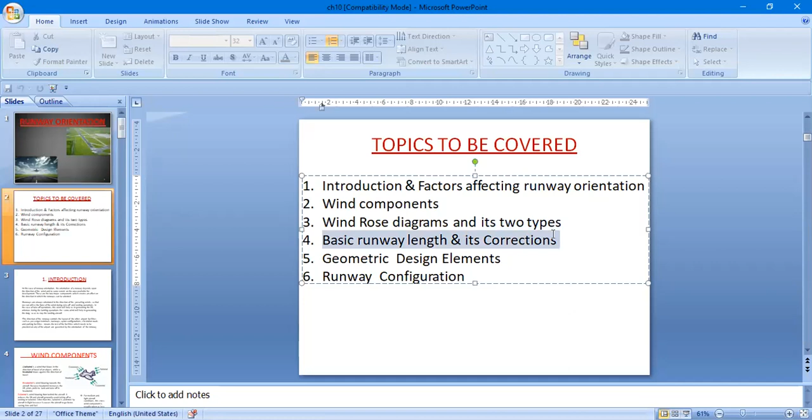You see, you have introduction, factors affecting the runway orientation, you have the wind components, wind rose diagram and its two types - this is very important. Then you have basic runway length and its correction - this is also very important. Then you have geometric design elements and runway configuration.

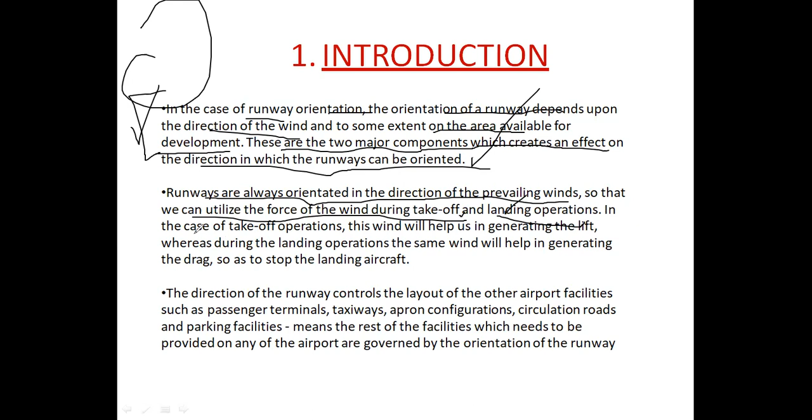Now, in the case of the takeoff operation, the wind will help us in generating the lift. Theek hai, lift generate karne mein help karegi. Whereas during the landing operation, the same wind in the prevailing direction, because aap opposite direction mein land karoge, will help you in generating the drag so as to stop the landing aircraft.

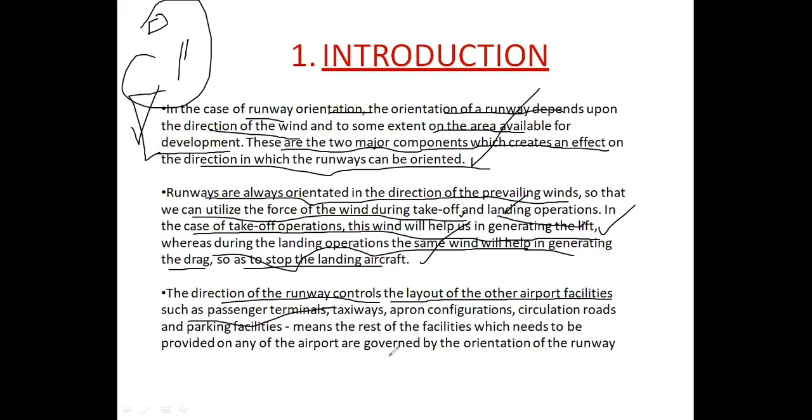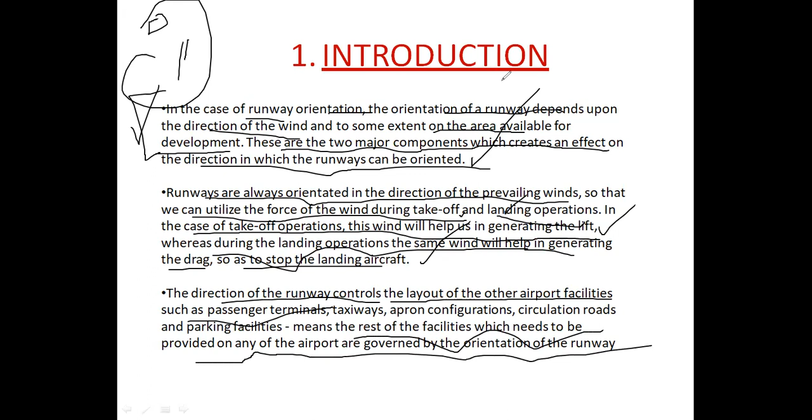The direction of the runway controls the layout of the other airport facilities such as the passenger terminals. Where the terminal buildings will be, where the hangars will be, where the aprons will be - all of that is dependent on the orientation of the runway. So the direction of the runway controls the layout of the other airport facilities such as the passenger terminals, the taxiways, apron configuration, the circulation roads and parking facilities. All the rest of the facilities which need to be provided on any airport are governed by the orientation of the runway. Is anyone having any problem with this?

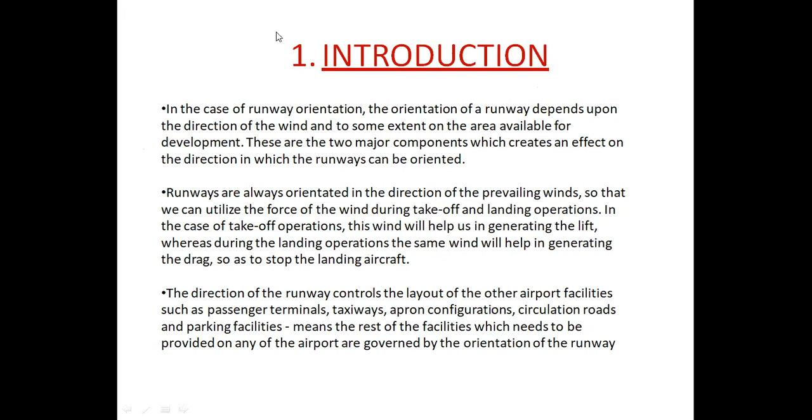Next we have wind components. Here the components of wind are shown. First, let's talk about tailwind and headwind. A tailwind is a wind that blows in the direction of travel of an object. If the plane is moving in this direction and the wind is blowing like this, this becomes your tailwind, because the wind is blowing in the same direction as the direction in which the object is traveling.

While the headwind blows against the direction of travel - so this is the headwind. If your plane is moving in this direction, the wind that is moving in the opposite direction becomes your headwind. Headwind is the wind that is blowing towards the aircraft, in the face of the aircraft. Because the headwind increases the lift, the pilot prefers to land and take off in the headwind.

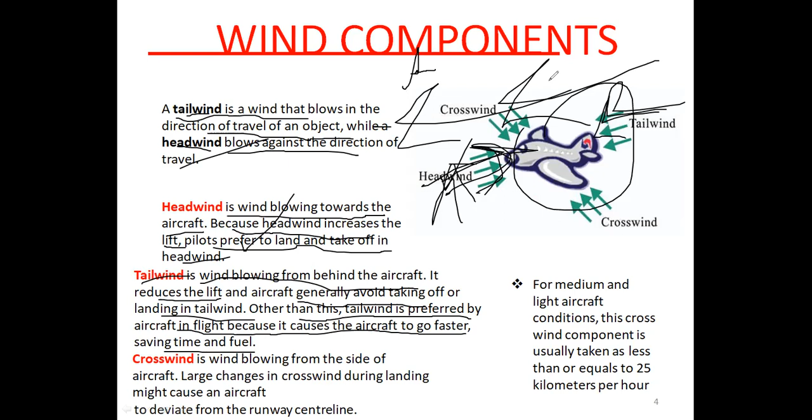It generates lift. Now coming to tailwind - tailwind is the wind blowing behind the aircraft. It reduces the lift, and the aircraft generally avoids taking off or landing in the tailwind. Other than this, the tailwind is preferred by aircraft in flight because it causes the aircraft to go faster, saving time and fuel. Once the plane is in air, once it has taken off, then it is preferred to fly in tailwind because eventually it will help reduce drag in air and help save time and fuel.

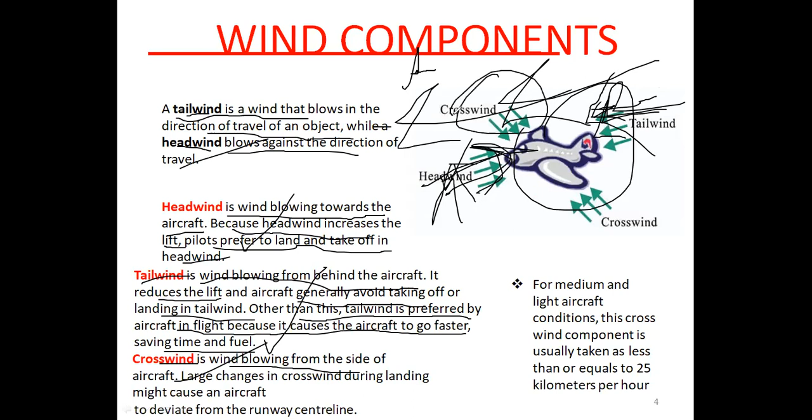Then you have crosswind. It is the wind that is blowing from the side of the aircraft, like shown here - this is the crosswind on either side. Now, large changes in crosswind during landing might cause an aircraft to deviate from the runway centerline. If the speed of the crosswind is high, the plane may have to deviate from its original path.

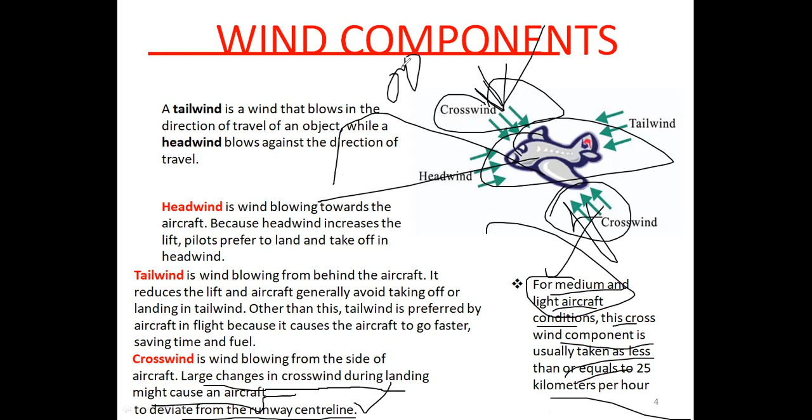For medium and light aircraft conditions, this crosswind component is usually taken as less than or equal to 25 km per hour. So this is for a particular category of aircraft - this crosswind component is supposed to be less than or equal to 25 km per hour.

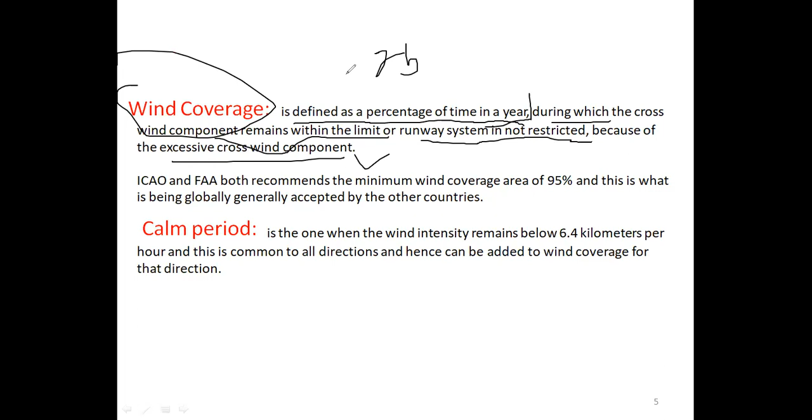Then is wind coverage. Now, wind coverage is the percentage of time in a year - percentage of what, you ask. It's the percentage of time in a year during which the crosswind component remains within the limit that is less than or equal to 25 km per hour, or the runway system is not restricted because of excessive crosswind component. Wind coverage is defined by how much time in a year the crosswind component remains below a particular limit - that is called wind coverage.

ICAO and FAA both recommend the minimum wind coverage of 95%, and this is what is generally globally accepted by other countries. So they're saying that in a year, at least 95% of the time your crosswind component will remain below 25 km per hour. So that is the type of area recommended for the airport site.

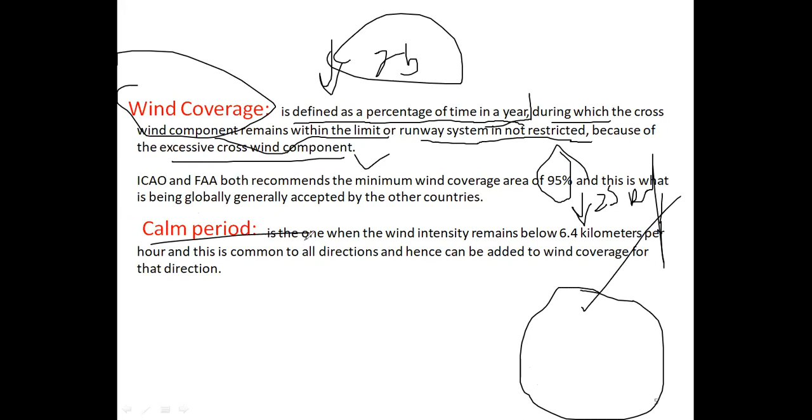Then you have the calm period. Calm period is when the wind intensity remains below 6.4 km per hour, and this is common to all directions and hence can be added to the wind coverage for that direction. So calm period means completely still air. When the wind intensity will be below 6.4 km per hour, that is considered the calm period.

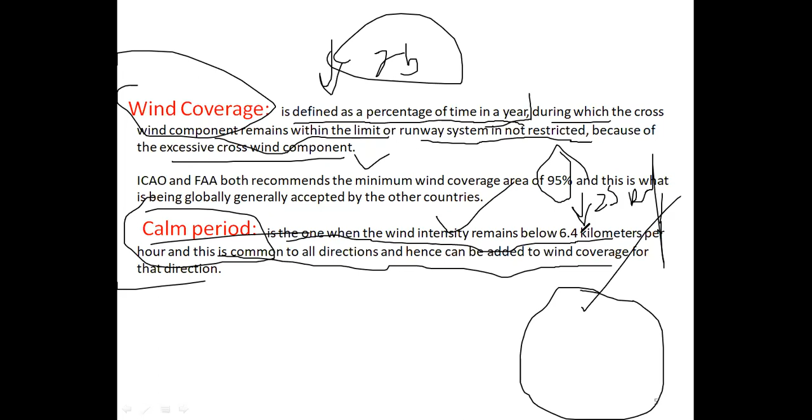उसके बाद आपके पास यह wind rose diagram है। This is very important to understand because eventually based on the wind rose diagram, the orientation of the runway is supposed to be done। अब wind rose diagram अगर देखा जाए तो है क्या?

It is a graphical tool that will give you a view of how the wind speed and the directions are typically distributed in a particular location.

मतलब wind rose diagram क्या है कि whichever airport site you have selected, you will be studying the entire wind pattern of that area - what is the speed of the wind, what is the direction of the wind in that area, and based upon that you will be plotting a wind rose diagram.

वो कह रहे हैं कितना wind का data आपको study करना पड़ेगा एक wind rose diagram को plot करने के लिए। तो आगे उसमें लिखा हुआ है the average wind data of 5 to 10 years is used for preparing such type of wind rose diagram। तो कम से कम 5 से 10 साल का आपको data चाहिए जिससे आप एक wind rose diagram बनाओगे।

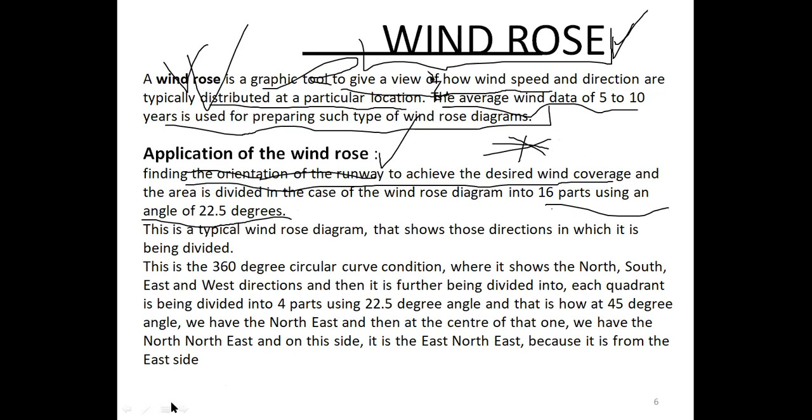अब for example आप यहाँ पे देखेंगे कि area को उन्होंने divide कर दिया, ठीक है। तो basic 4 directions आप सब aware हैं - north, south, east, west। In between आपके पास northeast, southwest, northwest होंगे। आप क्या करेंगे, between north and northeast they have also further divided it into north of northeast and east of northeast and east of southeast।

Then further you have south of southeast, south of southwest, west of southwest, west of northwest, north of northwest। So likewise the things have been divided।

So how the distribution has been done - the wind rose diagram has been divided into 16 parts using an angle of 22.5 degrees। 16 हिस्सों में आपने उन्हें divide कर दिया।

और इसमें अगर आप देखेंगे तो जैसे आप 360 divide by 16 करेंगे तो eventually it will turn out to be 22.5। Now this is typically a wind rose diagram that shows those directions in which it is being divided।

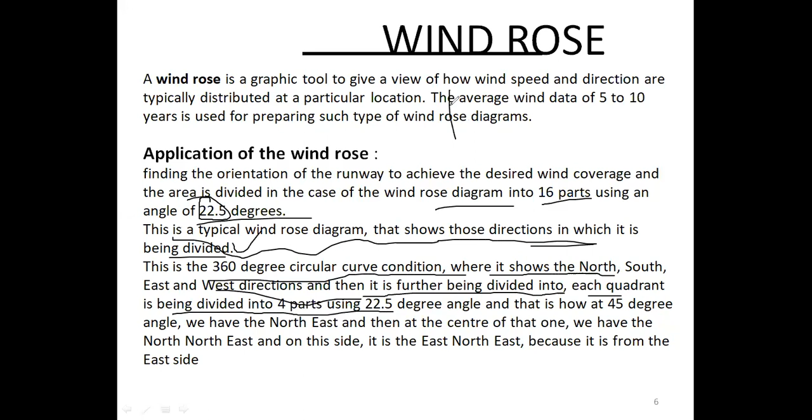Now this is a 360 degree circular curve condition where it shows north, south, east, west direction, and then it is further being divided into each quadrant - each quadrant is being divided into 4 parts, एक जो quadrant है उन्हें further 4 हिस्सों में बांट दिया, ठीक है, using 22.5 degree angle।

That is how at 45 degree angle we have northeast, and then at the center of that one we have north of northeast, ठीक है। वो मैं आपको already समझा चुका हूँ कि क्या करना है।

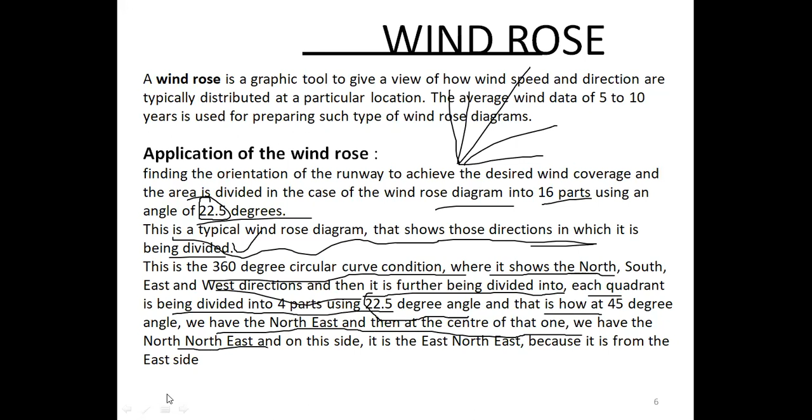आप 0 to 360 degree लेते हैं और उन सब 0 to 360 degree को divide करते हैं by 22.5, you are getting 16 directions, ठीक है। वो 16 directions you have to eventually plot। फिर wind rose diagram क्या है कि wind rose diagram आपका 2 तरह का होता है।

You have type 1 and type 2। Type 1 will show you the direction and the duration of the wind - कौन सी direction में और कितनी intensity है wind की, duration of the wind, time span की बात कर रहे हैं। Type 2 क्या कह रहा है कि it will show you the direction -

वो direction भी बताएगा, वो duration भी बताएगा और intensity भी बताएगा। किस way में हो गया - direction मतलब north की तरफ बह रही है और duration कितनी थी, जैसे साल में वो 300 दिन बहती है, ठीक है, या 200 दिन उधर की तरफ वो blow करती है। Type 2 में क्या होगा

कि आपको direction भी given है कि north की तरफ आपकी wind blow कर रही है, duration भी given है कि साल में से वो 200 दिन उधर blow कर रही है, और intensity भी given है। ये जो 100 किलोमीटर per hour वाली wind है वो suppose इतनी duration के लिए north direction में blow कर रही है, या ये 40 किलोमीटर per hour वाली wind है, वो northeast direction में इतनी duration के लिए blow कर रही है, ठीक है, इस way में।

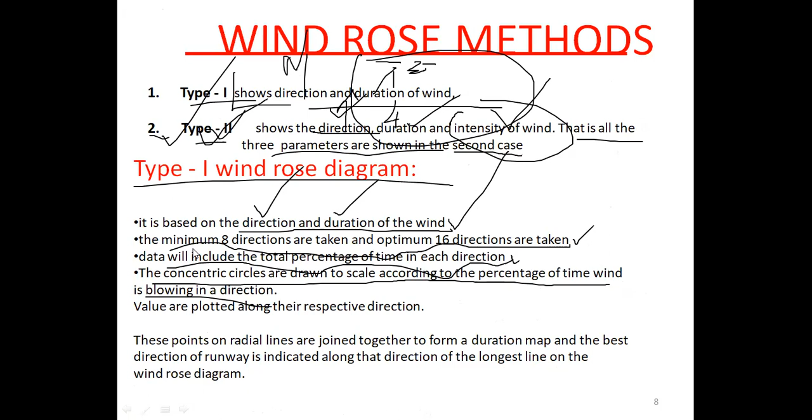Now for example, let's look at a numerical. Suppose you are given wind data. What is this wind data representing? If you see here, you have a wind data with a star, so it is an average of an 8-year period. This is all an 8-year average.

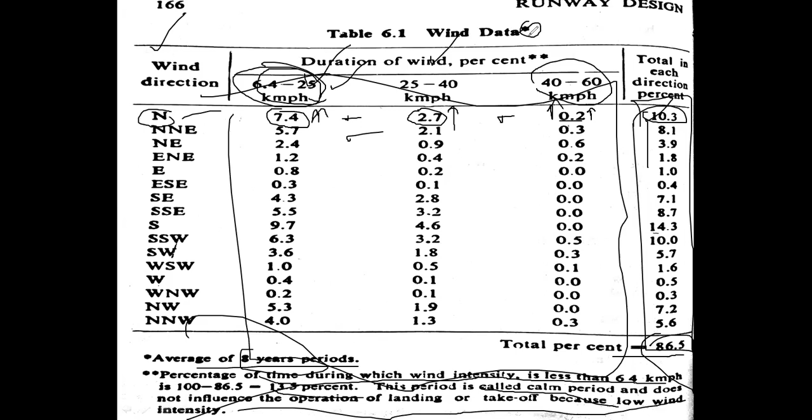How eventually will you draw the concentric circles? You will go back and see this. You will study these values - maximum is around 14.3. What is the minimum here?

0.4 के करीब है। तो डिपेंडिंग ऑन योर मैक्सिमम एंड मिनिमम फिगर्स यू विल हैव टू डिसाइड।

अब आप यहाँ पे देखो, मैक्सिमम और मिनिमम पीरियड मैंने देख लिया, उसके बेस पे मैंने एक 0 पे डॉट लगा दिया, उसके बाद 5, उसके बाद 10, उसके बाद 15, बीच में यू इवेंचुअली कैन फाइंड आउट योर अदर वैल्यूज। अब आप क्या करोगे कि नॉर्थ डायरेक्शन में कितने परसेंटेज ऑफ टाइम के लिए आपकी विंड बहती है?

इज 10.3। तो यू लोकेट 10.3 कि नॉर्थ डायरेक्शन किधर है, सबसे तो पहले वो लोकेट करो। हम विंडरोज डायग्राम 1 की बात कर रहे हैं। विंडरोज डायग्राम 1 मतलब क्या? मतलब डायरेक्शन और ड्यूरेशन, इंटेंसिटी नहीं आएगी।

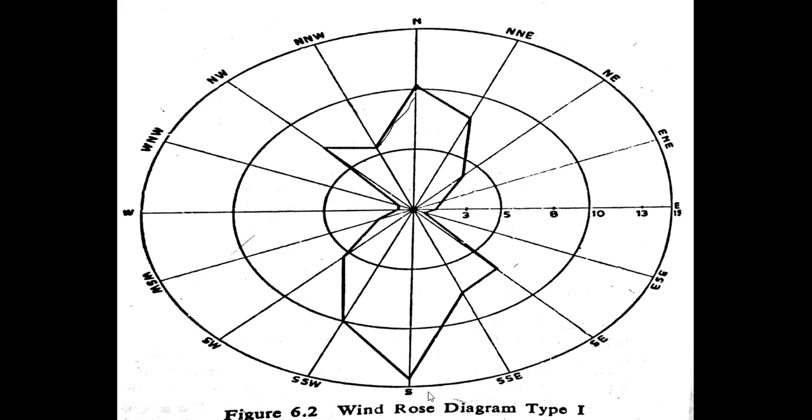Okay, similarly over here you can find out in which direction your runway will be oriented. Your runway will be oriented in north and south direction because that is the line along which you have the maximum wind coverage. जिस डायरेक्शन में आपकी मैक्सिमम विंड कवरेज है आप उसी डायरेक्शन के अलॉन्ग आप प्रेफर करेंगे अपने रनवे को ओरिएंट करने के लिए।

एनी प्रॉब्लम सो फार यू हैव? एनीवन हैविंग एनी प्रॉब्लम?

Kindly take your time and just go through it once. Okay, just go through these slides once. एंड जैसे ही आप पढ़ लें मुझे कोई भी आप में से एक मेरे को बता दीजिएगा, मैं आगे नेक्स्ट कर दूँगा।

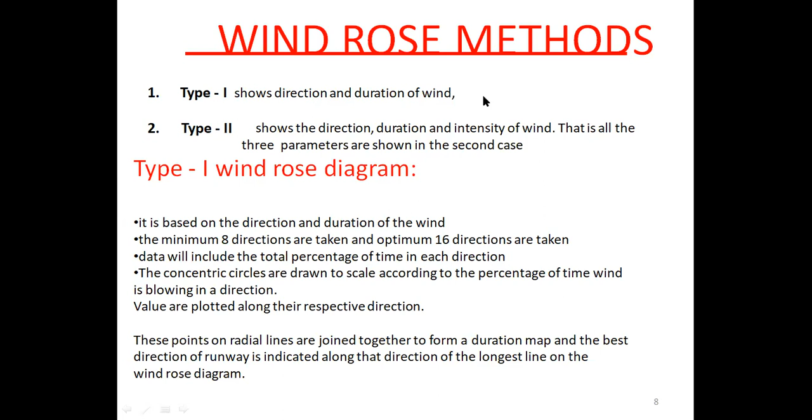Yes, sir. Yes, sir. Yes, sir. Yes, sir.

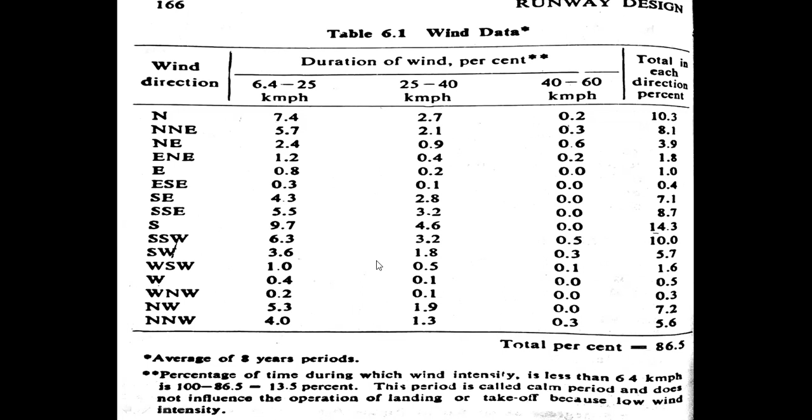Is this data clear to everyone? What has been given to you in this? Yes, sir. Once you are clear with this, just have a look on what you have done in Windrose diagram 1.

Your main purpose of plotting the windrose diagram is to find the area of maximum wind coverage. So in whichever direction you have the maximum wind coverage, that is the direction in which you are eventually going to orient your runway.

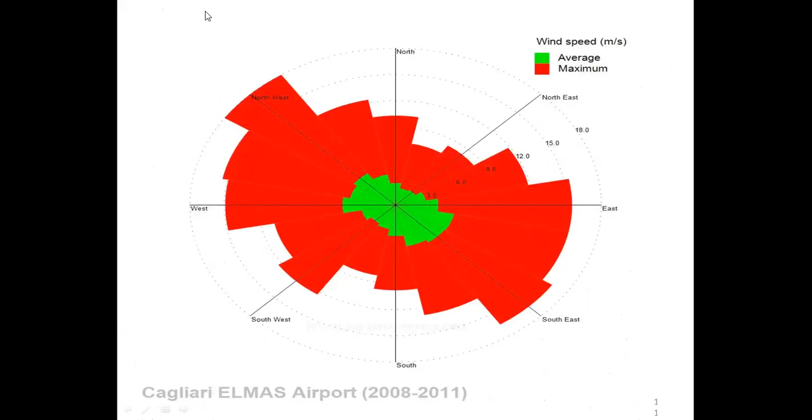So now let's move to the next slide. Now next part that you are supposed to cover is Windrose diagram 2.

Now here what you have is you will be covering all the parameters of the wind. You will be covering the direction, duration and the intensity. So this is based upon direction, duration and intensity of the wind.

The concentric circles are drawn to scale according to the wind velocity and not on basis of the percentage of the time। कि पहले विंडरोज डायग्राम 1 में आपने क्या किया था कि जो आपके कंसेंट्रिक सर्कल्स थे अलोंग द डायरेक्शंस वो आपने बनाए थे बेस्ड अपॉन द परसेंटेज टाइम, बट इसमें आप बनाओगे बेस्ड अपॉन द विंड वेलोसिटी। वेलोसिटी मतलब इंटेंसिटी के बेस पे बनाओगे।

The influence of the wind is assumed to be spread at an angle of 22.5 degrees in a direction, and the radial lines from the center are drawn up to the midpoint of the two directions, thus dividing the space into 16 directions। अब यहाँ पे what eventually you are going to do is कि अब यहाँ पे आप देखें, मैं आपको आगे दिखाता हूँ कि this is eventually what you will be doing।

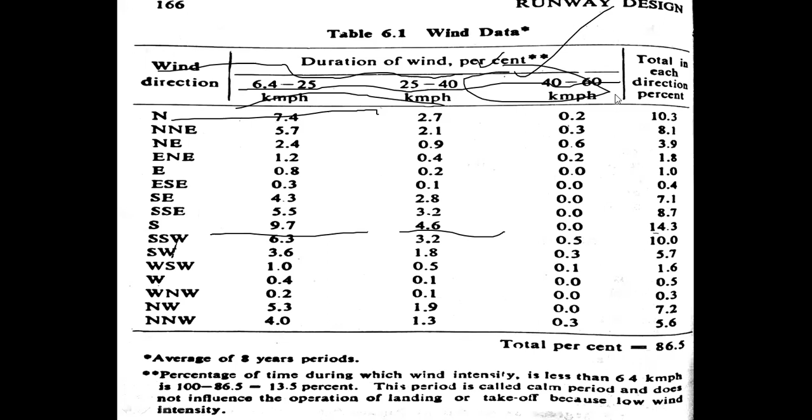Starting from 0, you have 6.4, 25 km per hour, 40 and 60 km per hour. Thereafter what you have to do is draw concentric lines between the various directions as radial lines.

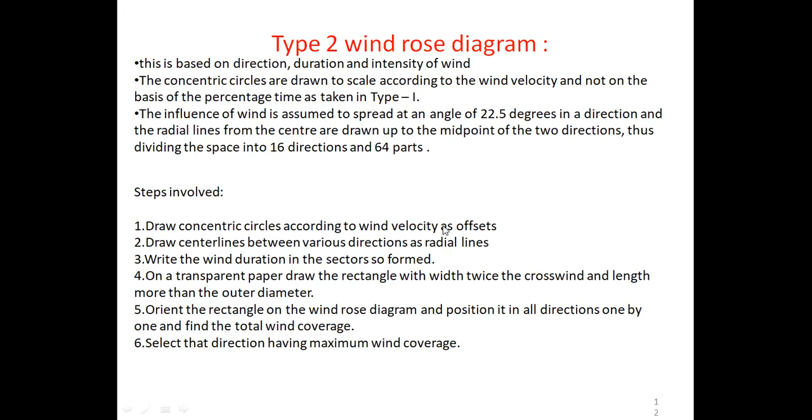Then we come to the next part, that is the basic runway length. Now in this you have a numerical, you have two numericals. We will be discussing those two numericals first.

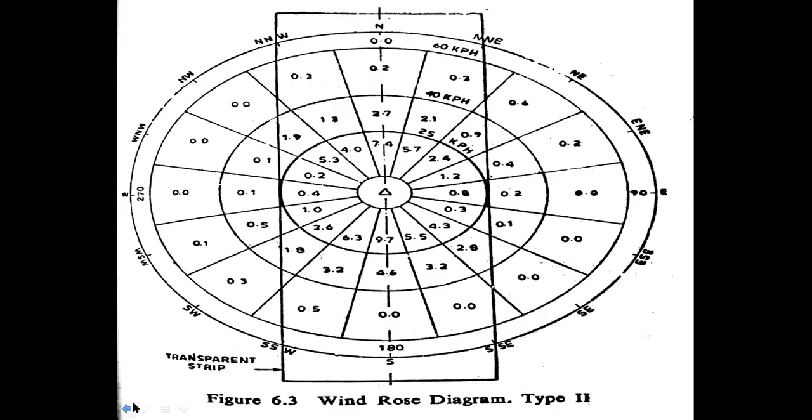Anyone having any problem in Windrose diagram 1 and 2? No sir. Did everyone understand?

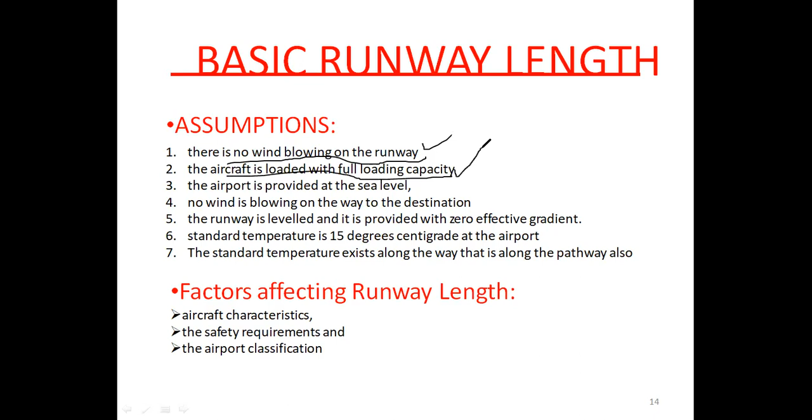Now basic assumptions are given to you for the runway length, how much length is supposed to be proposed for a particular runway. There is no wind blowing on the runway. These are the assumptions we are taking to define the runway length, okay? Now the aircraft is loaded with full loading capacity, and the airport is provided at sea level.

These are assumptions, but actually nothing like this will be true when you are deciding a runway length. You cannot have every airport at sea level. There may be different elevations depending on the area you have, like where you have selected your airport site. The elevation or the reduced level of the airport may vary.

No wind is blowing on the way to the destination, meaning no wind blows till the destination. The runway is leveled and it is provided with zero effective gradient, meaning whatever effective gradient is needed for drainage, you haven't provided any of that.

Standard temperature is 15 degrees centigrade at the airport. The standard temperature exists along the pathway also, from point A to point B.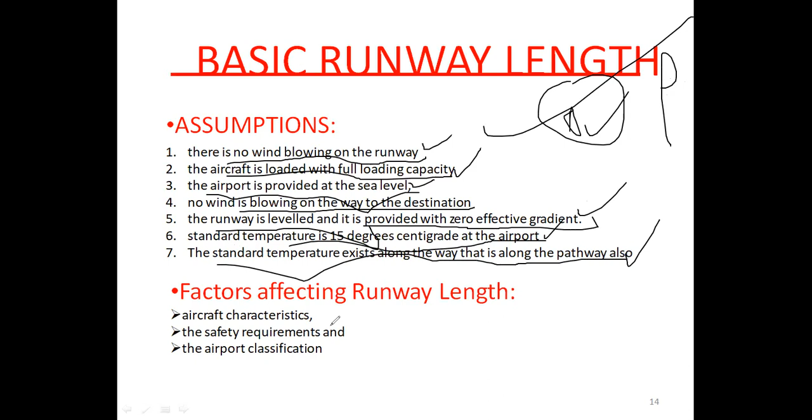What are the factors affecting the runway length? You have airport characteristics, the aircraft characteristics, safety requirement and airport classification. Now we are first going to discuss aircraft characteristics, how it is affecting the runway length.

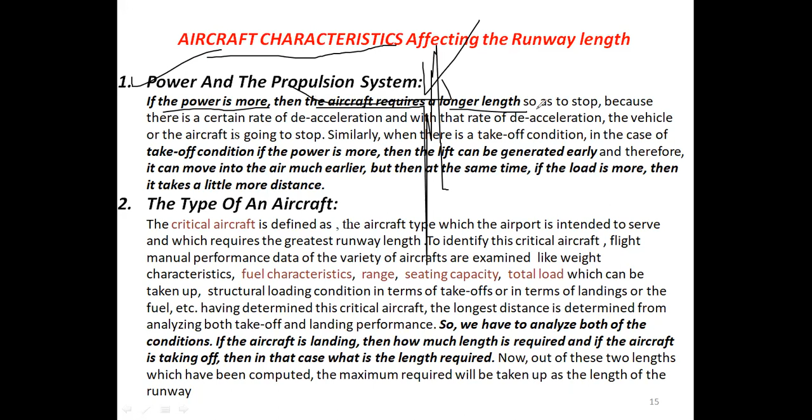The first point they mention is that in aircraft characteristics, the first point is the power and the propulsion system of a particular aircraft. Now if the power is more, the aircraft will require more length. If the power is more, obviously you will have to require a longer length for the aircraft to stop, because there is a certain rate of deceleration.

With that rate of deceleration the aircraft is going to stop. Similarly, when there is a takeoff condition, if the power is more then the lift can be generated earlier and therefore it can move into the air much earlier, but if the load is more then it takes a little more distance. So if the power is more, for stopping you will require longer length, but for takeoff you will require lesser length. Now it is in correlation to the amount of load that you have put into your aircraft. If you have increased the load then it may take some more distance as well.

Then you have this type of aircraft - the critical aircraft is defined. This is an example of how you define the critical aircraft. The aircraft which the airport is intended to serve and which requires the greatest runway length. The critical aircraft is an aircraft type which the airport is intended to serve, meaning the airport can serve that particular aircraft, and it requires the greatest runway length.

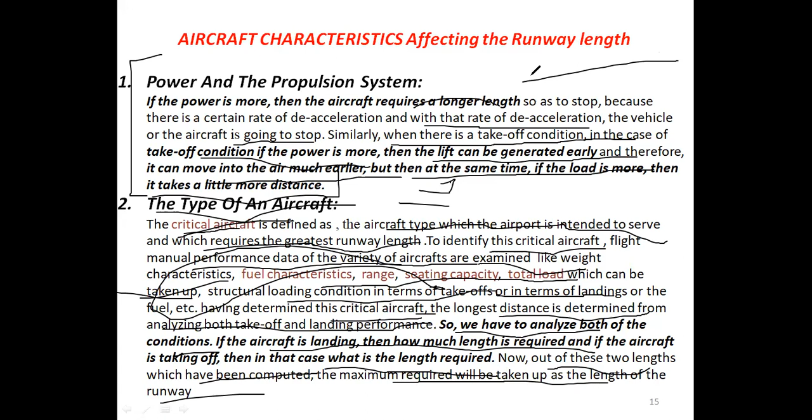So we have to analyze both conditions: if the aircraft is landing, how much length is required, and if the aircraft is taking off, how much length is required. Now out of these two computed lengths, the maximum required will be taken up as the length of the runway, depending on the critical aircraft. Whichever length is greater, that length is taken as the length of the runway.

After that comes gross takeoff and landing weight of an aircraft. Now if there is a heavy takeoff load, then obviously the aircraft will require more power, and to get more of this power it has to run more distance, so the length will increase.

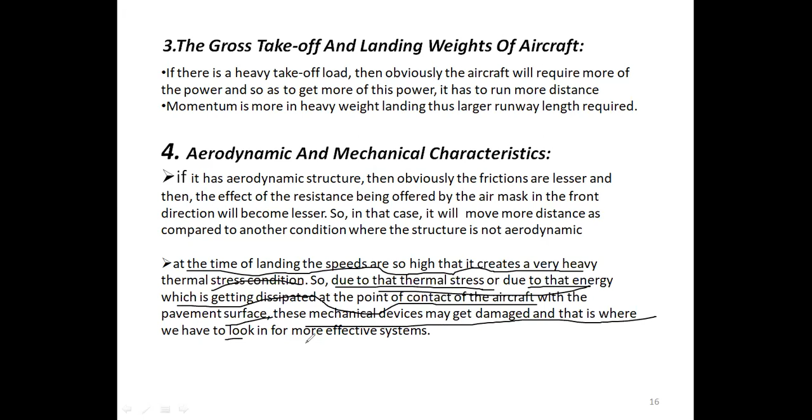Now, further, at the time of landing, the speeds are so high that it creates very heavy thermal stress conditions. Due to those thermal stresses, or due to the energy which is getting dissipated at the point of contact of the aircraft with the pavement surface, these mechanical devices may get damaged. Due to the thermal stresses, that is where we have to look into more effective systems for takeoff and landing.

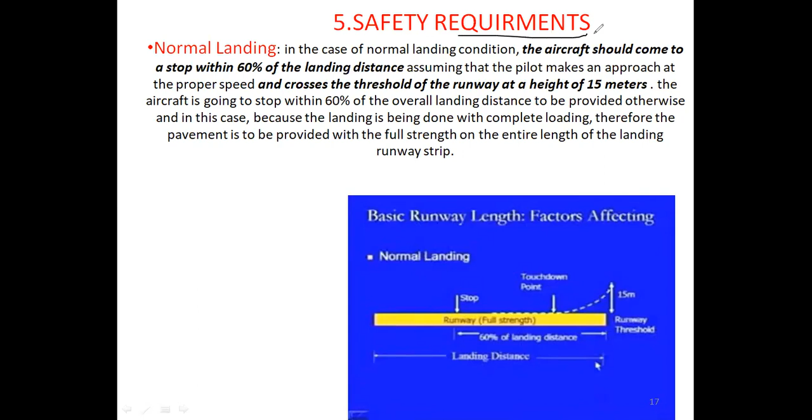Okay, then they have defined normal landing. This is the safety requirement. Based on the safety requirement, how much runway length is supposed to be required? In case of normal landing condition, the aircraft should come to stop within 60% of the landing distance.

What they are saying is, under normal conditions, what should an aircraft do? An aircraft should come to stop within 60% of the landing distance, assuming that the pilot makes the approach at the proper speed and crosses the threshold of the runway at a height of 15 meters.

The threshold of the runway, the threshold marking where you have to land, the pilot has to cross that threshold at 15 meter height. If this is the runway threshold, the pilot while landing had to make sure that at this very point it is approximately 15 meters.

The aircraft is going to stop within 60% of the overall landing distance to be provided. Otherwise, in this case, because the landing is being done with the complete loading, therefore the pavement is to be provided with full strength on the entire length of the landing runway strip.

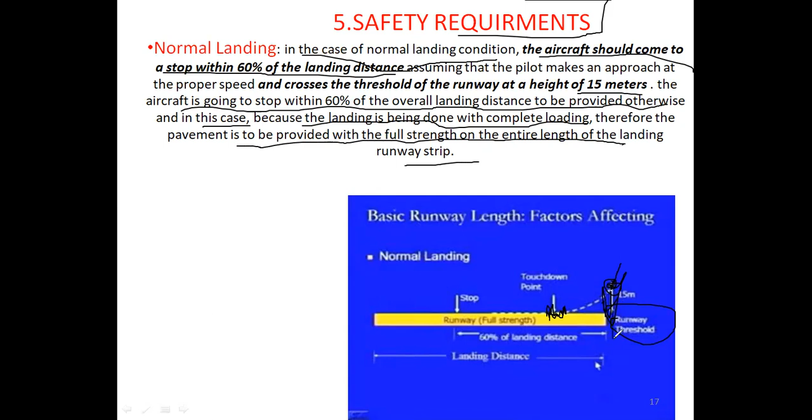In normal landing, what they are doing is that they are only considering 60% of the landing distance. If at the threshold your plane is at 15 meters, then after touchdown, the full length you are considering from the runway threshold to the stop position, that is 60% of the runway length that you are considering in normal landing.

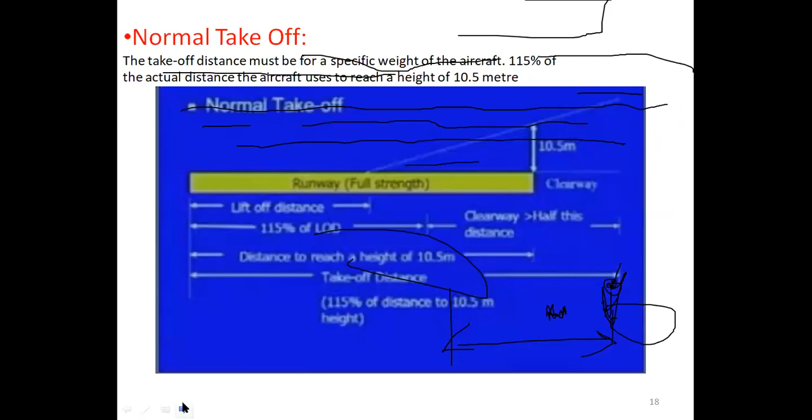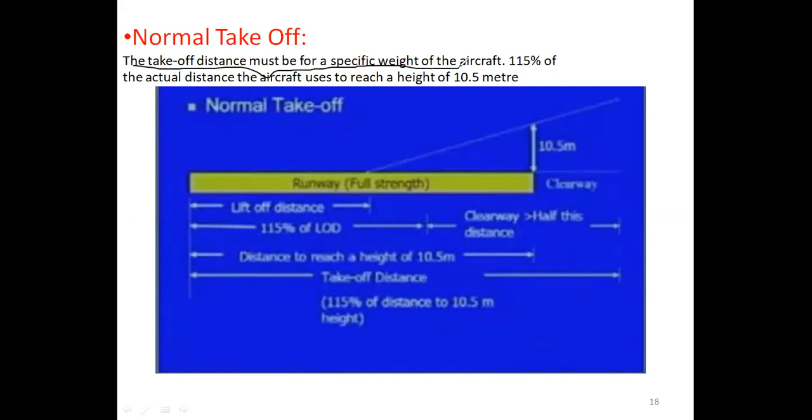Then you have normal takeoff. If you talk about normal takeoff, the takeoff distance must be for a specific weight of an aircraft, 115% of the actual distance the aircraft uses to reach the height of 10.5 meters.

Now in what way are they saying this: suppose this is your runway length, full strength which is your complete pavement, this is the lift off distance required, this is 115% of the lift off distance. Now this is the distance required to reach a height of 10.5 meter in air.

All right, and thereafter you have your clearway. So entirely this becomes your takeoff distance. The normal takeoff, how you are deciding it, is 115% of the actual distance the aircraft requires to reach the height of 10.5 meters.

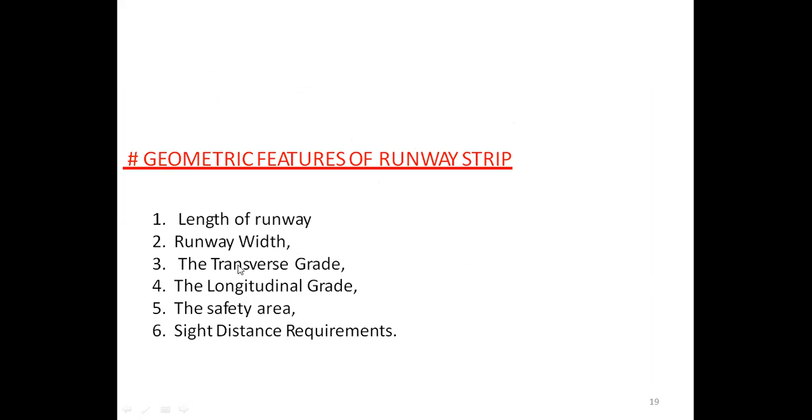Then further geometrical features of the runway strip, you can study this yourself. We have length of the runway, runway width, transverse grade, longitudinal grade, the safety area, and the sight distance requirement. So these are all given. Runway length: the above runway length will undergo correction for elevation and temperature, and combined correction for gradient, and the final length arrived will be the actual length and will be implemented in the field.

This is for aircraft types A till E. That is given to you: what is the width of the pavement, what is the maximum longitudinal gradient. Now the longitudinal gradient should not be too high.

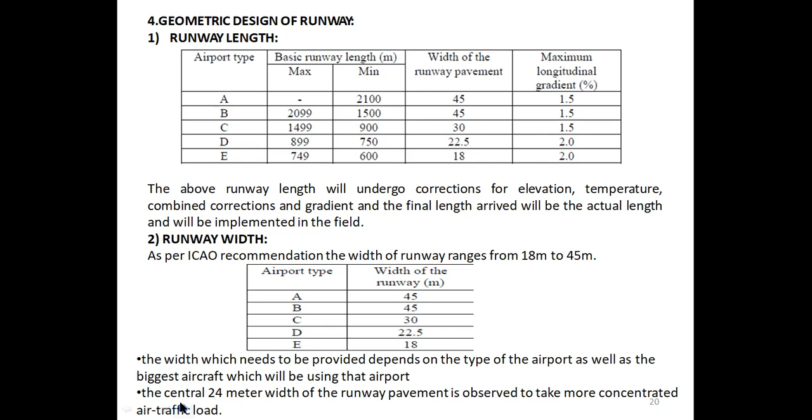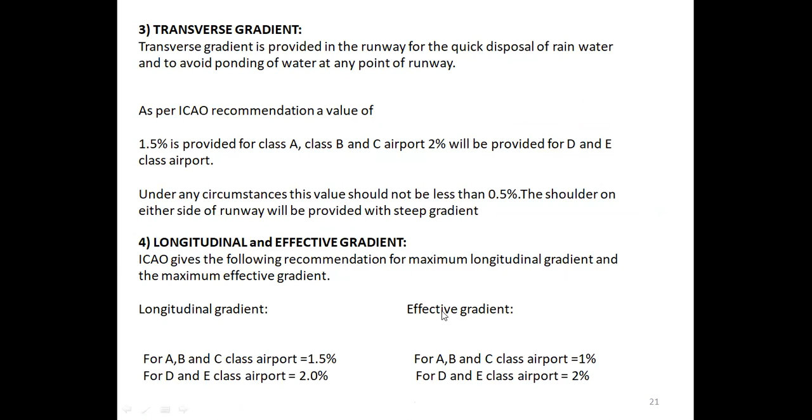At every point of time you want your runway length to be clear from water. Then you have longitudinal and effective gradient. The longitudinal gradient is also given, the effective gradient is also given. ICAO gives the following recommendation for the maximum longitudinal gradient and the maximum effective gradient to be present on the runway, because eventually you have to dump your particular rainwater at a particular place.

Then you have the width of the safety area. The runway safety area is cleared, drained, and graded on the sides. It includes the structural pavement, the shoulder on either side of the runway, and additional width. The shoulders are generally unpaved, meaning there is no concrete surfacing on them, as they are used only in case of emergency.

Then you have the sight distance. There is generally no sight distance restriction on the longitudinal gradient for the runway, but there are chances for collision of aircraft at the point where two runways or a runway and a taxiway intersect. For ABC class airports, any two points 3 meters above the surface of the runway should be mutually visible.

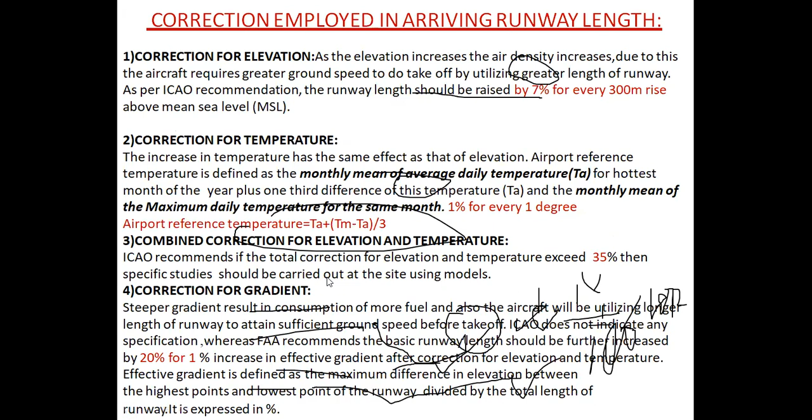ICAO recommends that the total correction for elevation and temperature, if it exceeds 35%, then specific studies should be carried out on the site using various different models. अब हमारा जो चेक है वो 27% आ रहा है, which is eventually less than 35%. So it is less than the maximum value of 35% given by ICAO, hence it is okay. We can proceed forward and apply the next check.

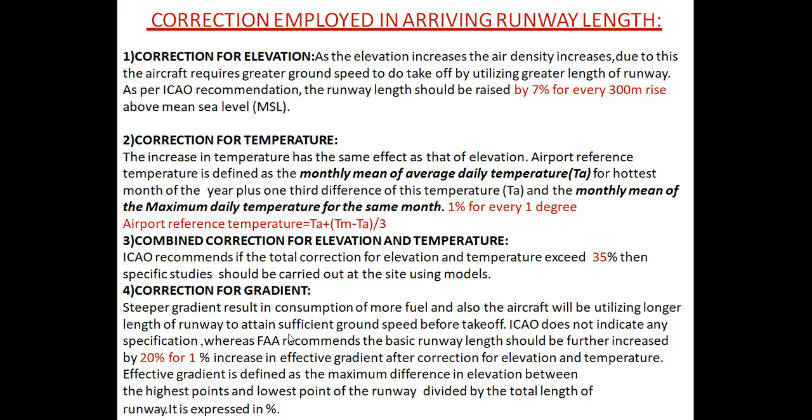Now then you have correction for gradient. अब correction for gradient आप कैसे निकालोगे? It says 20% for 1% increase. Gradient कितना आपने बढ़ा देना है? 20% increase in the length for every 1% increase in the gradient. 20% increase in the length.

So if you have 20% increase in the length for 1% increase in the effective gradient, so for 1%, how much increase will you have? You have 20%. Then for 0.2%, how much will you have? That is what is supposed to be calculated.

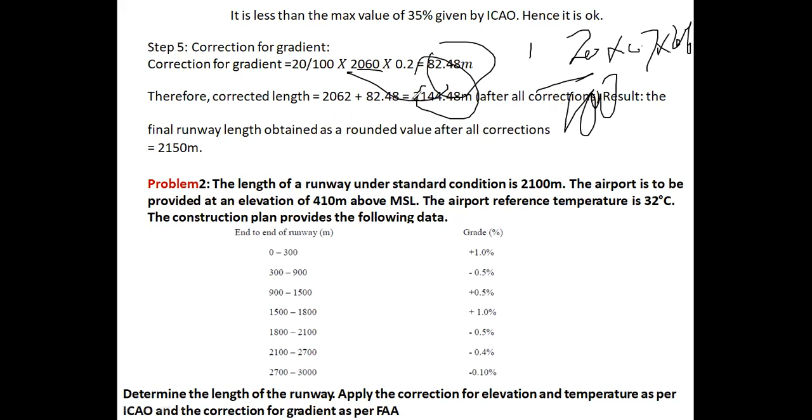So if for 1% you have 20% increase, means 20 divided by 100. For 0.2, how much will you have? And then for 2060 length of the runway, how much will you have? It is 82.48. इसको 2062 में add कर दो, ठीक है, you eventually get the total length of the runway after the correction. The final runway length obtained, that is rounded off, 2144.48 to 2150.

Okay, so kindly go through this numerical. Kindly try and solve this yourself. I am giving you 5 minutes to solve this numerical yourself. So after 5 minutes, we will ask you questions. Or if you have any problem, you can just let me know. All of you, kindly take out your notebooks and your pen and just try and solve this numerical.

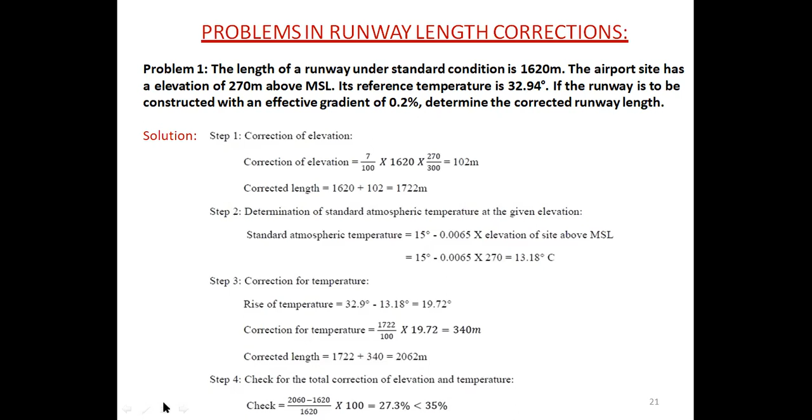Next numerical करें. Yes sir, next what we have is the length under the standard condition is 2100 meters. The airport is provided an elevation of 410 meters above the mean sea level. The airport reference temperature is 32 degrees C, and the construction plan provides the following data. The end-to-end runway and their grades is given to you: 0 to 300 meters is plus 1%, 300 to 900 is minus 0.5% and so on.

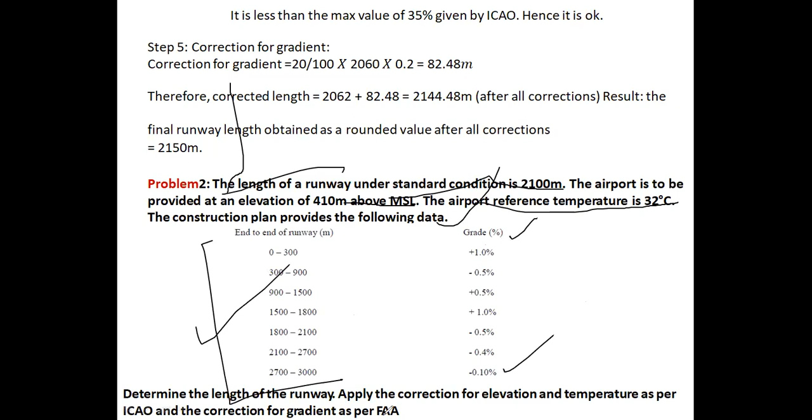ठीक है, सारा न्यूमेरिकल सेम रहेगा, सिर्फ जहाँ पे आपने ग्रेडियंट की करेक्शन लगानी है वो बदल जाएगी। Determine the length of the runway, apply the correction for elevation and temperature as per ICAO and the correction of the gradient as per FAA. तो आप यहाँ पे देखेंगे the entire numerical is the same.

Correction for elevation वही 7% इंक्रीज करना है 300 मीटर के पीछे। So how much is your actual elevation? It is 410. So how much will be your correction for elevation? It will be 7 divided by 100 into 2100 into 410 divided by 300. 200 मीटर आएगी। तो करेक्टेड लेंथ आपकी 2100 प्लस 200 हो जाएगी। देन करेक्शन फॉर टेम्परेचर निकालनी है।

स्टैंडर्ड एटमॉस्फेरिक टेम्परेचर निकाल लो, it is coming out to be 12.34. व्हाट इज द राइज इन टेम्परेचर? 19.66. सो बेस्ड ऑन द राइज इन टेम्परेचर, 1% इंक्रीज करना फॉर एवरी 1 डिग्री राइज। तो हमारा 19.66 है। बेस्ड ऑन 19.66 यू विल फाइंड आउट द करेक्शन एंड देन देयर आफ्टर यू कैन फाइंड आउट द करेक्टेड लेंथ।

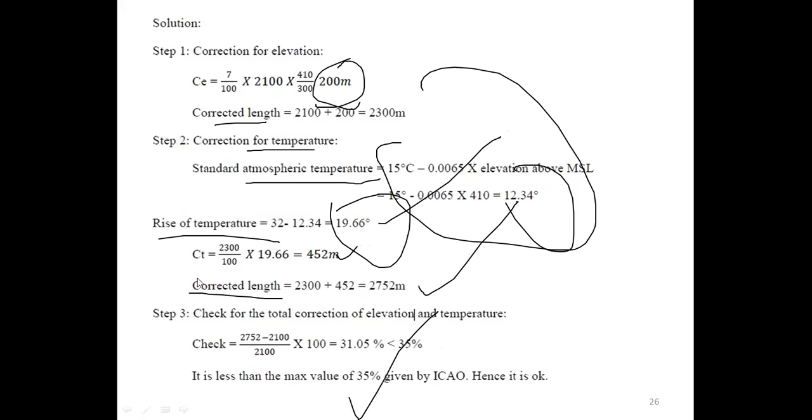वो आपकी निकल जाएगी, ठीक है, उसके बाद आपने चेक लगा देना है: जितनी भी आपकी लेंथ आ रही है 2752 माइनस इनिशियल लेंथ डिवाइड बाय इनिशियल लेंथ इनटू 100, 35% से कम होनी चाहिए। इट इज ओके। देन फर्दर यू इवेंचुअली मूव फॉर द करेक्शन इन ग्रेडियंट।

ठीक है, तो करेक्शन इन ग्रेडियंट कैसे करेंगे? The elevation of the different points as per proposed grading plan will be as follows. अब चेनेज में दे रखा है 0, 3, 9 मतलब 300, 900। चेनेज में दे रखा है, ठीक है, 100 मीटर की एक मान रखी है। उसके बाद एलिवेशन अब कह रहा है निकालो।

एलिवेशन कैसे निकालनी है, आपको पीछे नहीं जाना, टेबल में सारी चीज़ें दे रखी है। 0 से 300 जब आप जा रहे हो, हाउ मच इज द इंक्रीज इन द ग्रेड, इज 1%। ठीक है, सो इफ आई एम सेइंग इट इज 1%, सो माय एलिवेशन इज हाउ मच, इज 100, 100 से मैं शुरू कर रहा हूँ। अब वो कह रहा है कि आगे जब आप 300 से 900 में गए, तो कितना लेंथ आप ट्रैवल कर गए हो?

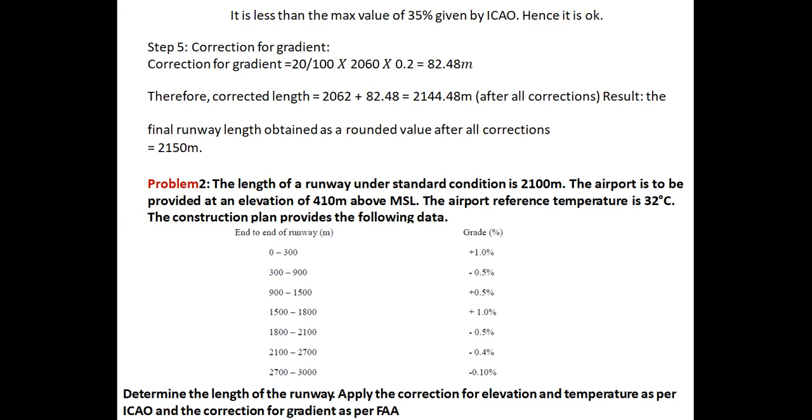3। यहाँ पे 0 से 300 पे जा रहे हैं। 0 से 300 पे जाने में कितनी लेंथ इंक्रीज होनी चाहिए? 300 इंक्रीज होनी चाहिए। उसके पीछे ऑपोजिट साइड में देखें कितना ग्रेड इंक्रीज हो रहा है, 1% हो रहा है। अगर 1% हो रहा है तो 300 इंटू 0.01, इसी फॉर्म में निकालेंगे।

300 इंटू 1%, दैट इज 1% इंक्रीज डिवाइडेड बाय 100, सो 3 इज योर आंसर। सो एट 0 द एलिवेशन, ये assumption मान ली 100। 3 पे चले गए, 300 इंक्रीज हुई, उसके हिसाब से निकाल लिया 103। 300 से 900 पे गए, कितना हो गया हमारा?

कितना लेंथ चले गए? 600। 600 इंटू 0.5 डिवाइडेड बाय 100, कितनी वैल्यू आई? 3। वो अब माइनस में है, तो इसमें से माइनस कर दो। 103 माइनस 3, 100 आ गई। अब उसके बाद फिर आगे चलो।

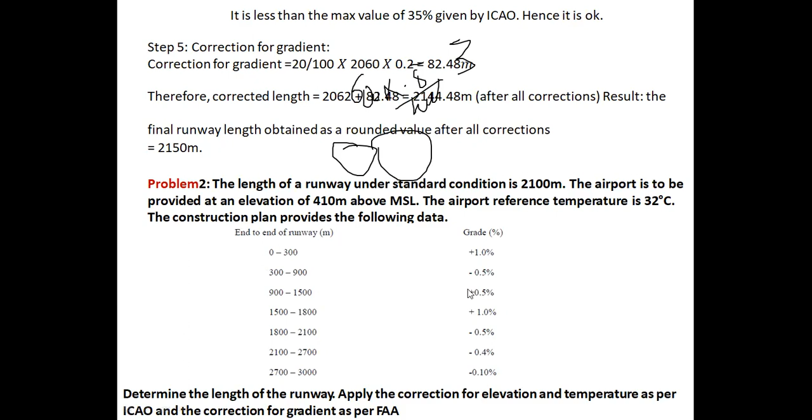900 से गए 1500 पे, कितनी लेंथ? 600। 600 इंटू 0.5 डिवाइड बाय 100, फिर से क्या वैल्यू आएगी? 3। बट अब पिछली वैल्यू में ऐड कर दोगे। ऐसे ही करके उन्होंने सारी इफेक्टिव ग्रेडियंट की वैल्यूज निकाल रखी हैं।

The maximum difference of elevation is how much? The minimum is 100 and the maximum is 106 meters. Therefore, the effective gradient is how much? It is 6. Okay, so how much is the increase?

The effective gradient they have found out is 6 divided by the total length that you have after applying the correction, 2755 into 100. So this is the effective gradient, 0.218.

तो हमने क्या पढ़ा था? 20% इंक्रीज कर देना है for every 1% increase in the gradient। So if for every 1% increase there is 20% increase, then for 0.218% increase, how much will be the increase? It will be 120.5.

तो वो आपने इसमें ऐड कर देना है 2755 में। दिस इज योर एक्चुअल लेंथ 2880, और यू कैन राइट इट एज 2875.5 meters.

Any problem you have up till here? No, sir.

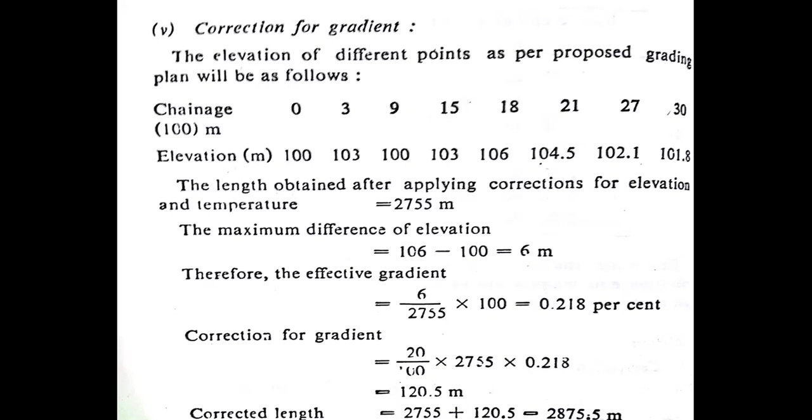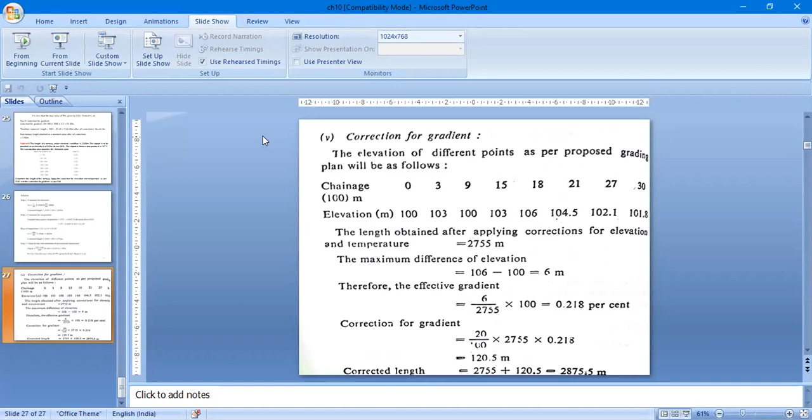This sums up your chapter. Anyone is having any problem in this chapter? Any one of you is having any problem? No problem, sir. Okay, now the next chapter, that is chapter number 11.

इसमें क्या, हम इसे next lecture में करेंगे, but I'll just tell you, you can just have a look at it. These two chapters are very small chapters. We'll try and finish off in the next lecture.

तो इसमें विजुअल एड के बारे में बता रखा है। विजुअल एड में आपकी सारी मार्किंग्स आ जाएंगी, रनवे मार्किंग्स। रनवे मार्किंग्स के बारे में बता रखा है, हाउ दी रनवे डेजिग्नेशन मार्किंग्स आर रिटन। जैसे 200 डिग्री है, उसका 0 उठा दो, you get 20।

लाइकवाइज, एल मतलब लेफ्ट की तरफ है, सेंटर में होता तो सी होता, राइट में होता तो आर होता। तो रनवे मार्किंग्स के बारे में मेनली यहाँ पे बता रखा है। उसके बाद टैक्सीवे मार्किंग्स हो गई, शोल्डर मार्किंग्स हो गई, एप्रन मार्किंग्स हो गई।

अब उसके बाद लाइटिंग में आ जाएंगे कि रात को, क्योंकि एयरपोर्ट्स आर सपोज टू बी यूज्ड बोथ ड्यूरिंग डे एंड नाइट टाइम। So eventually at night time also you will want some lighting to be there so that you can judge whether it is an airport or a particular route.

तो वो सारी चीज़ें इसमें बता रखी हैं, how the lighting, which color lights you are supposed to use on an airport, which color lights are supposed to be installed so that properly it is clear that it is an airfield.